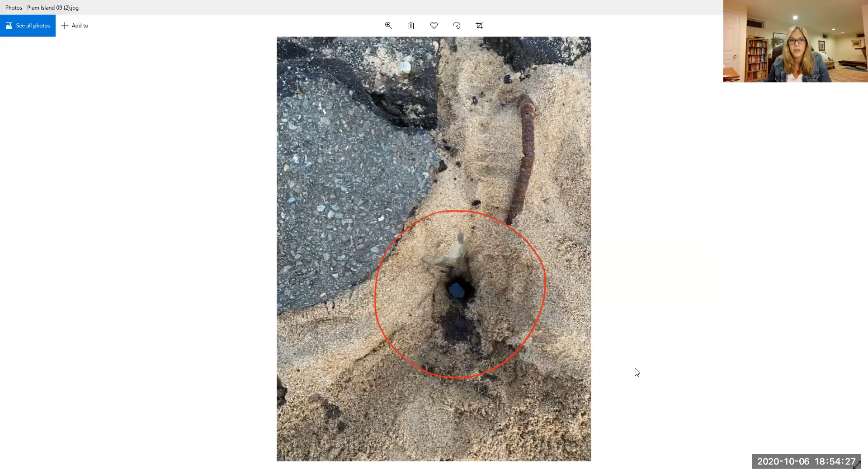I was out there like a month or month and a half ago, and these things sticking up with these big pipes were not out yet. Yeah, here's another, can you see this? That's frightening. Yeah, this is the actual oil where they started to see it.

So they've been pulling oily water out of here, and they've already filled 8 barrels today, and they still haven't really even begun to get involved with what's down there. So it's a sort of a mystery. If this was a filling depot of some type, there could be a number of tanks, and they could be pretty large too, so it could get messy quick.

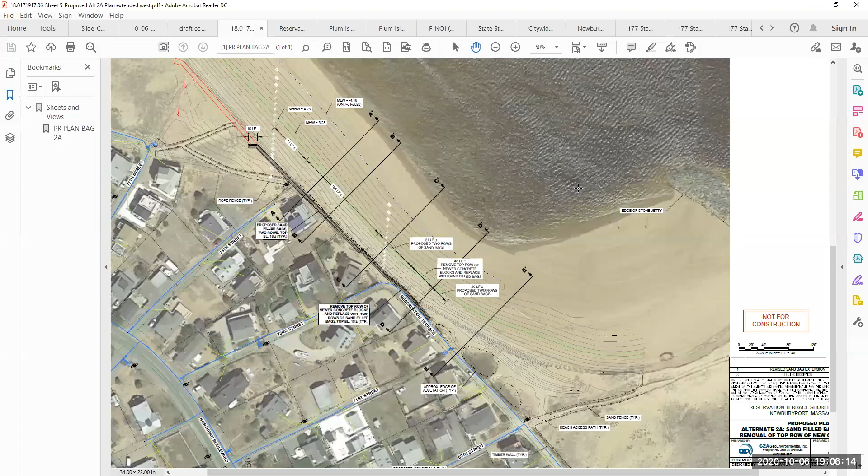Well, I'm personally not in favor of it. They're illegally put up there, and I don't know if the commission wants to have a vote on that. I'm fine with that. I have to be a no vote on that, because it's allowing.

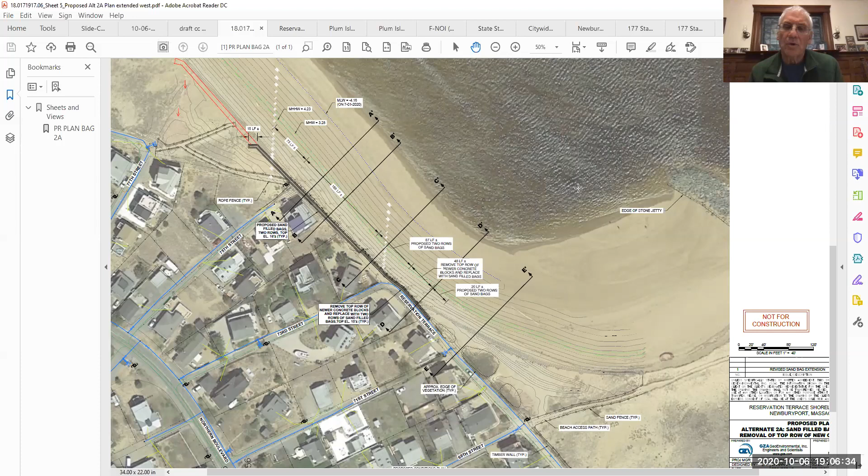What happens if those blocks are buried in 4 months? I'm sure no one is going to want to excavate beach sand to pull blocks out that were put there illegally. Well, I think you would be able to put something behind the blocks to shore up the sand. I think we'd be able to do that, and then take the blocks down and replace them with the super sacks.

Could I just ask a question? You had said that the super sacks were biodegradable—does that mean they're going to stay in place? We're hoping—again, I don't have definitive information on how long, since this is all new—but it's a fabric material that is very strong, obviously, to be able to hold 900 pounds of sand. They're certainly more durable than the fabric in coir bags, for sure.

I was just zeroing in on the fact that I originally thought DEP wanted these removed eventually. No, it's not that they don't want the super sacks removed—they want, like you, the cement blocks removed. Actually, Secretary Theoharides was very pleased that we were able to find something that was a temporary solution until the river is dredged and we can put that material back on Reservation Terrace, remove the super sacks, and hold them for an emergency.

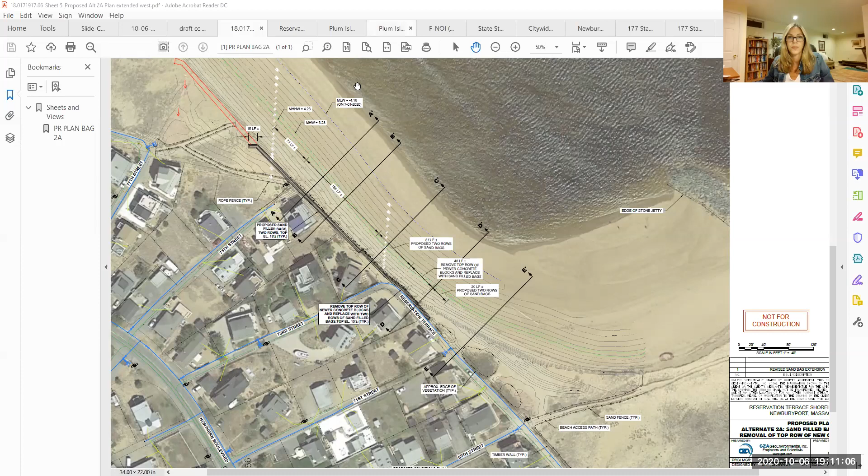No, I think we're all concerned. Can you see this? Not yet. No. Okay. Can you see it now? Hold on. Resume share. Oh yeah, okay. View share. Getting there. Now you can see this. Yes, yes, okay.

So I have zero issue with extending the bags out toward 77th. I just have a huge issue with the blocks. Right, and I apologize, there was a video, Donna, which I think someone sent to me, and it expired when I went back to find it today. The link to that was gone. It really showed the cement blocks, the waves pouring over, but then also showed the sand accumulating on the other side.

So aren't these super sacks taller than the blocks that get put on top of the blocks? Yes. So if you remove the cement blocks, which I believe are maybe 2 feet high, and replace them with something that's 3 feet high, I think that's a good thing.

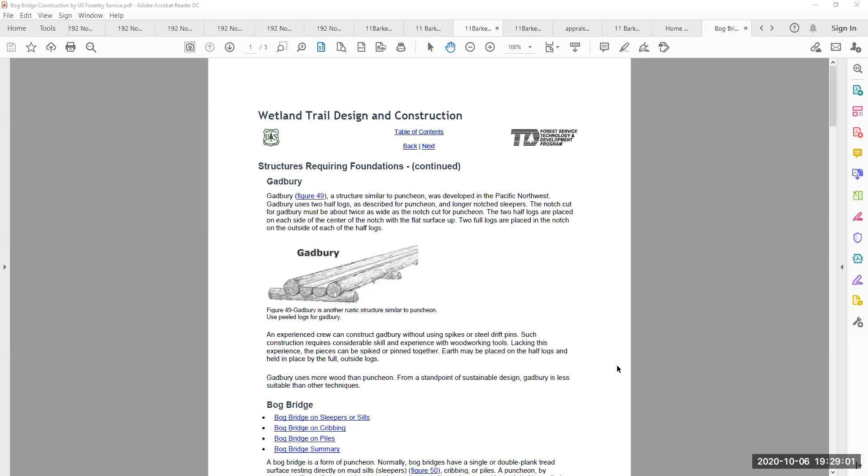So Julie, you were telling me that we have like $65,000. Yes, we do. We have some funds in the account that would be available if the commission wanted to vote to use some money to contribute to this project. Well, that's one of the things our money is actually for, doing stuff like this. I would hope we would consider paying for it. I'd be more than happy to pay for the wood required.

Okay, so the total would come to what? And then you all can vote on it, and we can get an invoice from Jerry. So that'd be like $1,866 or something. That's correct.

Okay, I'm good with that. Just out of curiosity, did you ask Home Depot to donate some of this? Because they do donate to charity. Yes, I did specifically let them know, and in the past they've always been very good about it. But because of the worldwide lumber shortage due to the pandemic, their corporate vetoed it. But we asked. Not surprising, it's fetching a pretty penny these days. Yeah, it's sad.

So again, Jerry, the process for this would be the way you invoiced us in the past through the Parker River Clean Water Association. Does that make sense? That makes sense. Yeah, okay.

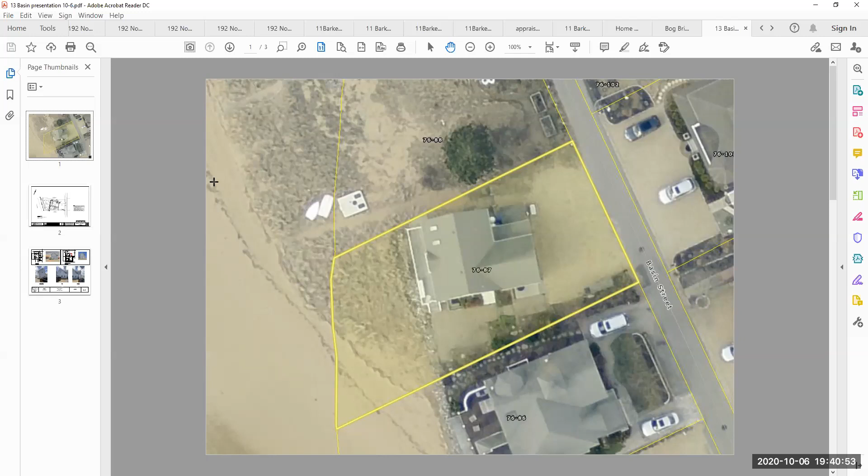So that's one thing. If we can go to the next sheet, this is less important, just a survey of the lot. It pretty much shows you the similar situation, with the elevation out front about 12.5 in that gravel area. It actually drops down at Basin to about 12.

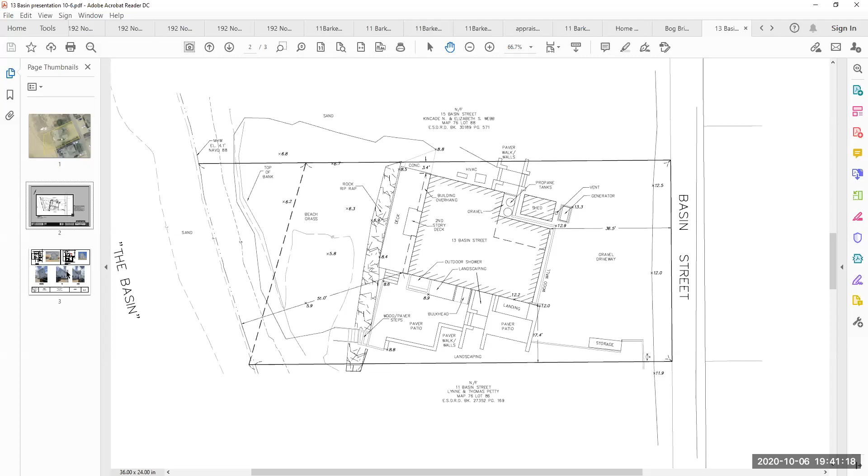When we met Julia on site, I think we agreed, at least at the time, it seemed to make sense from a floodplain perspective, if it's on the opposite side of the house from the source of the flooding, that it may actually have less of an impact in a sense than something that juts out across the direction of flow of the water, which the one on the side would do.

I would agree with that. Is there anything you can do by turning a window into a door or anything along those lines?

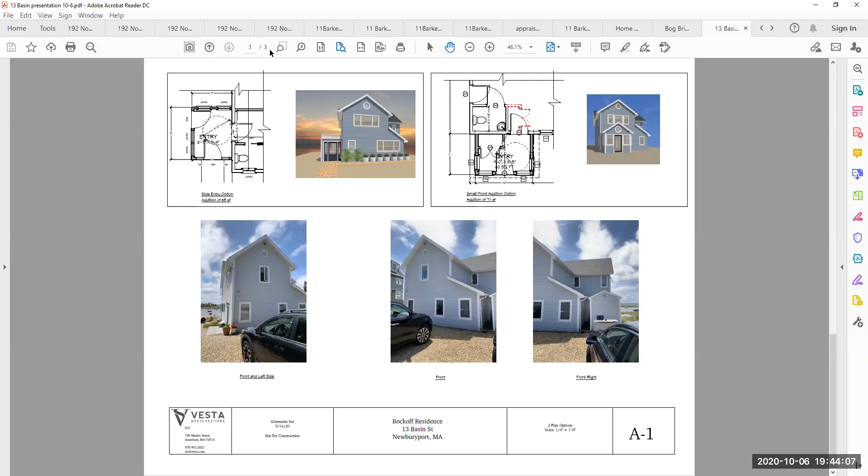Okay, so Julia, maybe you could zoom in on that upper right. This one, okay, hold on a sec. Okay, so this says 9 by 6 feet 5 inches. Is that right? Mm-hmm. Okay.

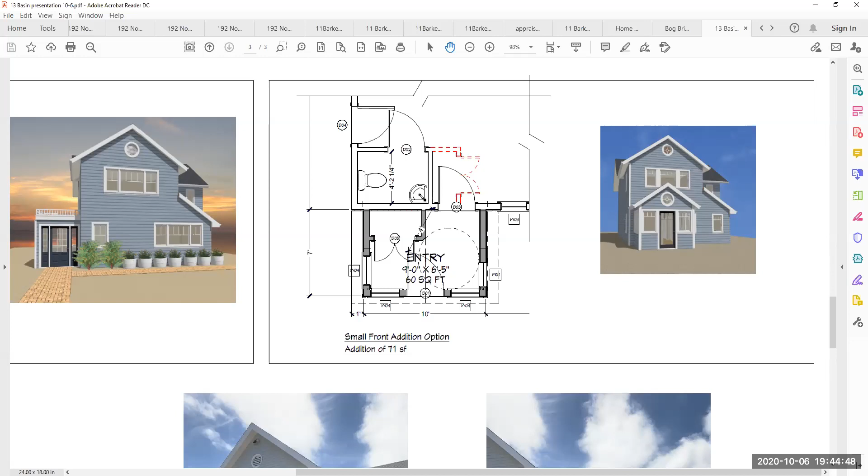So are you adding, is that a closet getting added? We had to remove the closet in order to put the door on this side. So we did add a closet because we had to remove the closet. So you're coming in where a closet existed, which you can see in red. Yes. So we're not trying to gain closet space, we're just trying to make it work.

And this new entry area is not heated. With these sort of breakaway walls, I'm not sure. It is within the flood zone, and we were planning on having it as a heated part of the house, but... yeah.

I guess my other question would be, why not shift the door to the right more and not have a fourth window? To get rid of the closet part of it... no, shift it to the right, so you have a straight shot in instead of having to angle over. The closet won't get in the way at all. Seems like it's in the way of the door now. You can't come straight in.

I mean, you could do that, but it's more important—there's several issues. When you're in a wheelchair, it's actually more important to have a minimum of 4 feet between the swings of 2 doors, which you can see this dimension on the plan, 4 feet. And so I have the 5-foot turnaround radius. When you have doors in sequence, ADA standards require a minimum of 4 feet to allow the doors to swing and the person in the wheelchair to still have space to maneuver. So moving that door over actually shortened that to somewhat under 4 feet, and I was trying to put a closet in there too, so I just used that space.

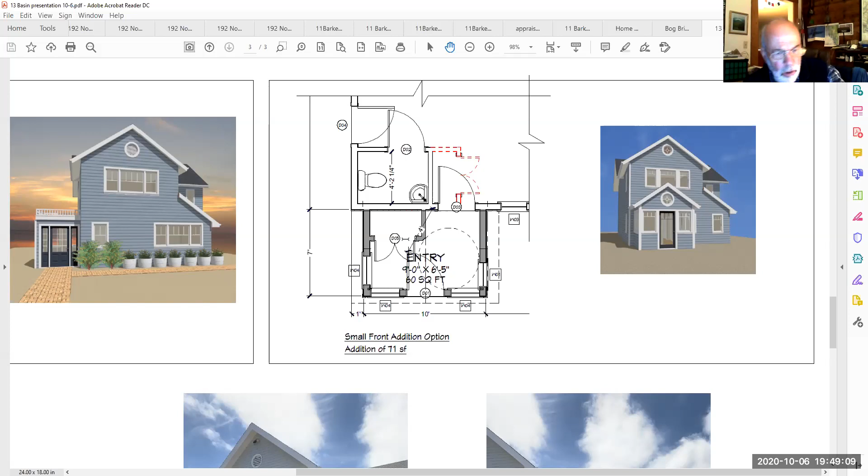So if I look at the picture on the left, in the front of the building with all those planters and stuff, you've got one window, and then you've got 3 windows. When I look at the picture on the right, I don't see that middle window or the left-hand window—I just see the window on the right.

So the middle window is a proposed change to the house on the first floor. And if you look at the right hand, you can actually see the edge of the existing window casing. Okay, those 2 windows are existing—the larger middle one was just something we were discussing.

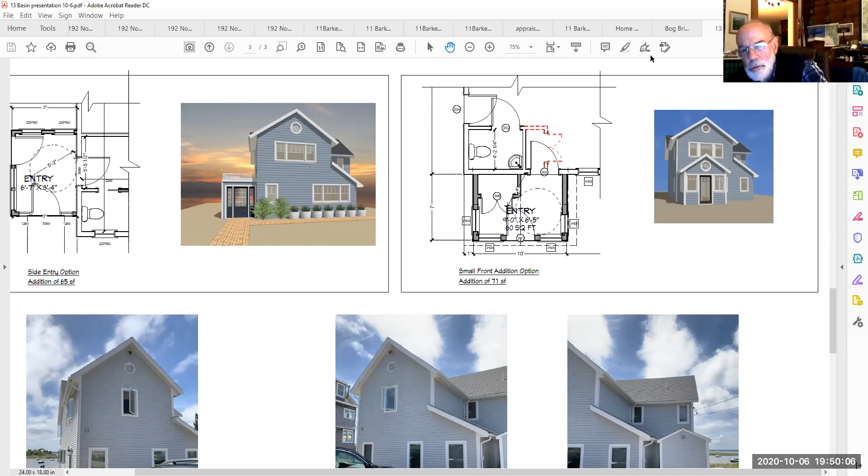So what I'm thinking is if you take this addition that you want to add and shift it to the right so that you can maintain that closet on the interior, then you'd have an entrance going straight into the home, and you wouldn't have to have a closet in an unheated portion of the building.

So the reason we wouldn't want to do that—I don't have the full plan, but the existing family room is like 9 foot by 10 foot, very small. If we were entering there, there would be no space for furniture in the room. I think they would be more interested in doing the side entry, because that room would not be usable anymore.

And that side entry, what room would that go into? Right now, if you see the picture on the bottom left, that's the existing entry door on the side.

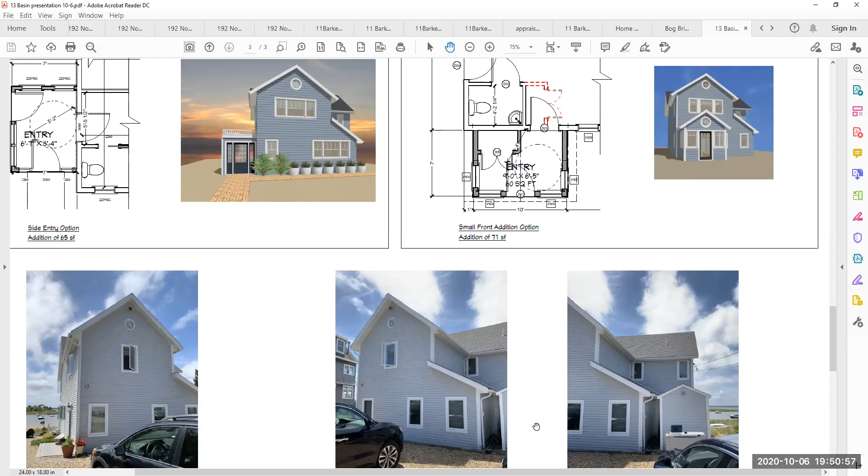The reasons we were less interested in that option are it's closer to the water. It's also, I don't know how the neighbors are going to respond, but it's one neighbor's view directly through to the water. I don't know if that's a consideration, but they probably wouldn't appreciate it.

Yeah, well, that's fine too, but I think the addition being in the shadow of the house, assuming direct floodwaters come from the basin, being in the shadow is a smarter way to do it.

I still have, as an engineer, I'm just confused as to why the door is centered on that thing and it's not shifted to the right a bit so it doesn't interfere with anything, and then there's a straight shot into the house instead of going in and going to the right a little bit.

But I think, and Rachel, you can probably confirm this, what we would plan on doing with our submission is give you more of the interior space layout, because I get the sense that it's the interior space layout that constricts where you come in. If you come in to a family room in a way that destroys the family room, you're taking away what little living space he's got on the first floor as is. So I think we could justify the location based on giving you a better sense of what the inside looks like beyond just where the closet is.

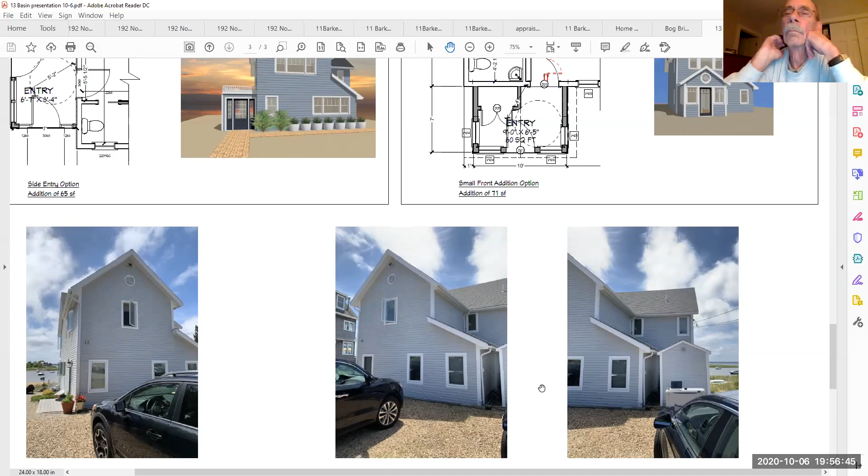It was unheated? I think we were planning to heat it. But I imagine it's like my folks had something like this before they moved out of their house - it was sort of an entry with its own little separate heater system so you don't lose all the house heat when you walk in. It just kind of keeps it warm to serve as that buffer, same thing as when you go into a store and go through that initial entry - there's heat, but it's not the same heat that's inside the building. It's a separate system typically. Is that correct? Yeah, that's fine.

Can I ask one more question? The grade of the driveway is actually a couple inches above the grade of the finished floor of the house. So when we remove the stone that's there now to put in something like chip stone that will be better for a wheelchair, does that need to be included? Yeah, I would include any of the landscaping change in materials associated with this as well.

Any resurfacing of the driveway should be included. Yeah, I think there's a good depth of gravel there, so it's probably just removal of gravel. Typically for driveways the commission has allowed up to a 6-inch cut, and I think we could stay consistent with that. I don't know the exact elevation changes, but whatever we have to request a variance or waiver for, we'll do, and make an argument for the performance standards as best we can.

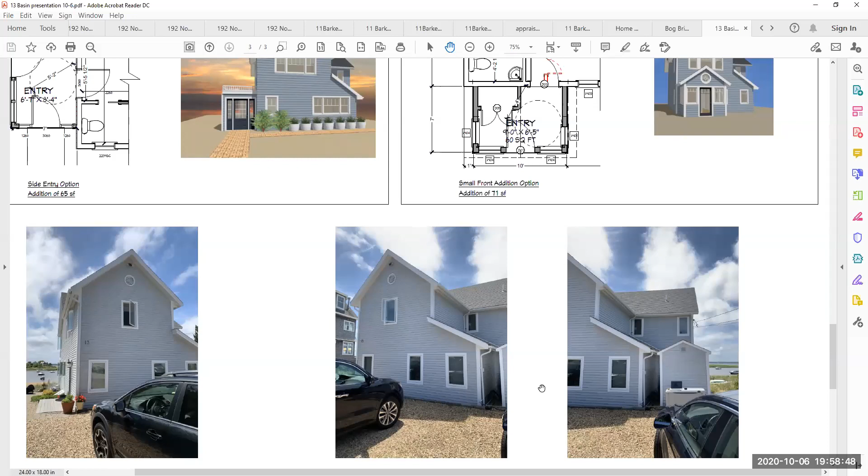Okay, so our plan is to try to put together an application to get on the next available meeting we can make, and we're going to have to race to do that. We need Everett to put together a site plan - he does have the survey plan, and now we know which option we're going with. We'll try to get this in the door ASAP, so just be ready.

If the commission wants to do a site visit in the meantime, that would help speed the process up. We'd really like to get this so the builder could maybe try to get something in for the winter. Does anyone want to do a site visit? I don't think I need to see one. Okay, pretty straightforward, excellent.

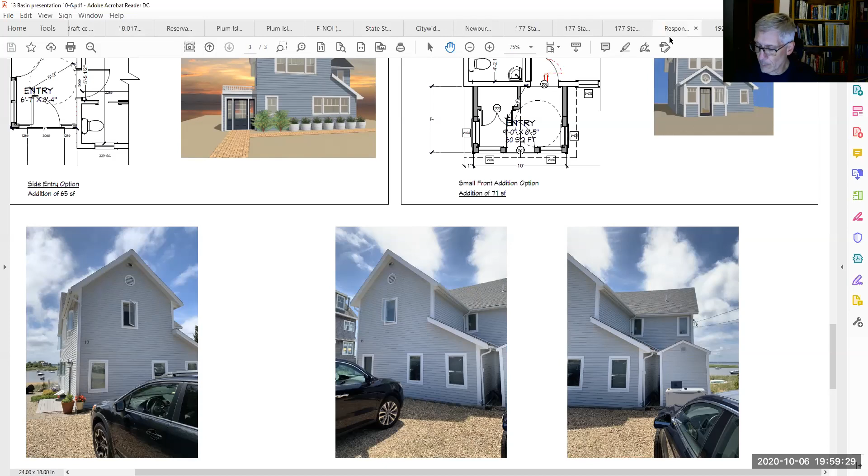Next item's George Hasseltine, 149 State Street. Let's see who's here. Is this Charlie? Anyone else here for 149 State Street? Is anyone here to speak for that? Got Charlie holding your hand up. Okay, unmute yourself, Charlie.

Yes, this is Tim Toomey - I'm using my son's computer tonight, so that's why you had to put your email address in. I had to use his to get onto the Zoom. So it's Tim Toomey, and I'm representing Gordon Realty Holdings and also George Hazeltine. I'm the licensed site professional that will be managing any soils out there that might be impacted by a previous spill, and I'm here to answer any questions you might have.

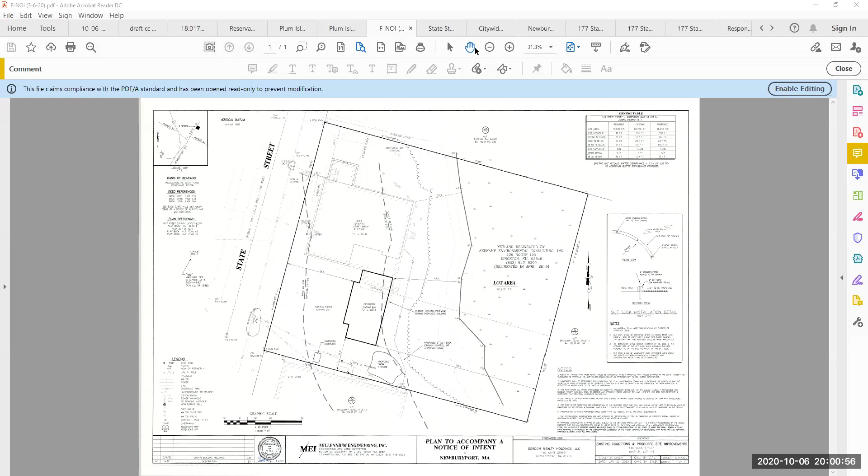I sent a letter in last week - Julie, did you get that? Yep, I have it, I believe, is this it? Yes. Anyway, the site was a location where some chlorinated solvents were released to the ground, basically on the top portion of that area where the major spill occurred. Throughout the property there is some residual contamination, and the addition is on the opposite side of the building.

The addition will involve digging a footing and placing a foundation there. So the soils generated during the construction of the footing and foundation will be managed on site and will not be disposed of any place. If it was, it would be managed under my license.

But there's just going to be a reuse of the soils over there. In the interim, when the soils come out of the ground, they'll be placed on a poly sheet and covered with a poly sheet to keep any rainwater from hitting the pile. Also, a silt sock will be put down on the down-gradient edge of where the pile is going to be placed.

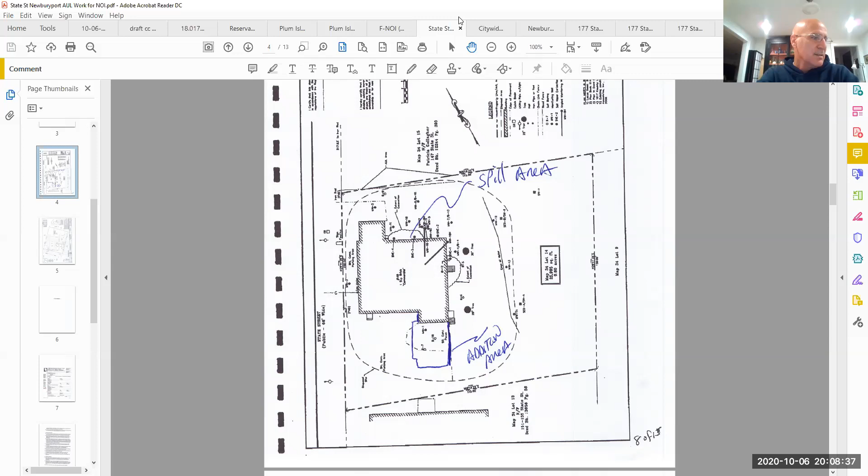Do you have a reference to where that investigation closure report would be? Yeah, it's on the DEP site, just look up the address, or you could put the release tracking number and search on that instead. Either way, you could get it. Newburyport, 149 State Street, it would come up, the report that I reviewed. The release tracking number is right here, it looks like it's 3-21054. Can you see that? That's correct, that's correct. The 3 being Northeast region, which is this region that the category is in for the DEP.

Okay, are we set with this? Any other questions? Everything's fine.

It looks like that this was the condition. We just needed this report and this presentation prior to their start of work on the site. So if you're all satisfied with this and they've submitted all the other necessary information prior to the start of work, then they can move forward.

Okay, do we have this report, Julie? I don't remember seeing this. They sent it to me. I thought that I emailed it to you all or forwarded it to you all for tonight's meeting. If not, I apologize, because I knew that they were going to give a presentation. If you'd like, I'll re-email it to you right after the meeting so you can have a copy.

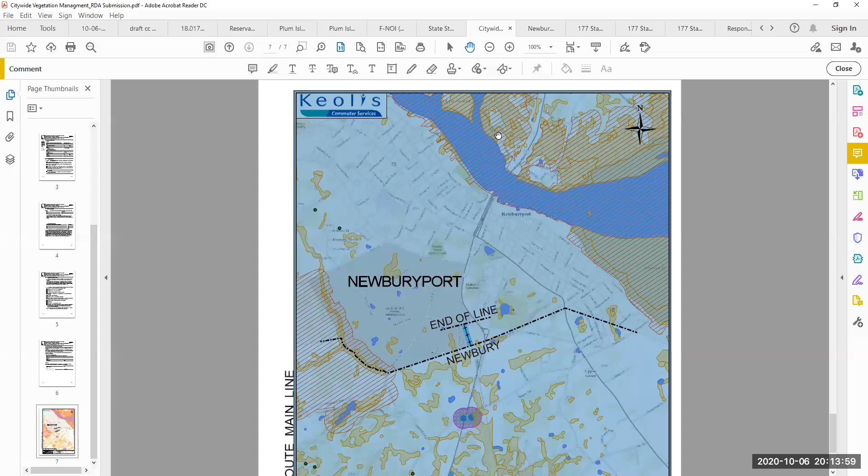So the RDA was submitted as part of CMR 11, as well as specific sections of CMR 10, which require us to submit the delineated maps to confirm that the boundaries of the resource areas are accurate. The requirements are part of a 5-year vegetation management plan, which is designed to manage and control vegetation along the railroad, necessary to keep it safe for the railroad and the public. As the plan is executed, great measures are taken to keep the sensitive areas protected, and the sensitive area restrictions are listed and described in detail in CMR 11, as well as Section 8 of our vegetation management plan.

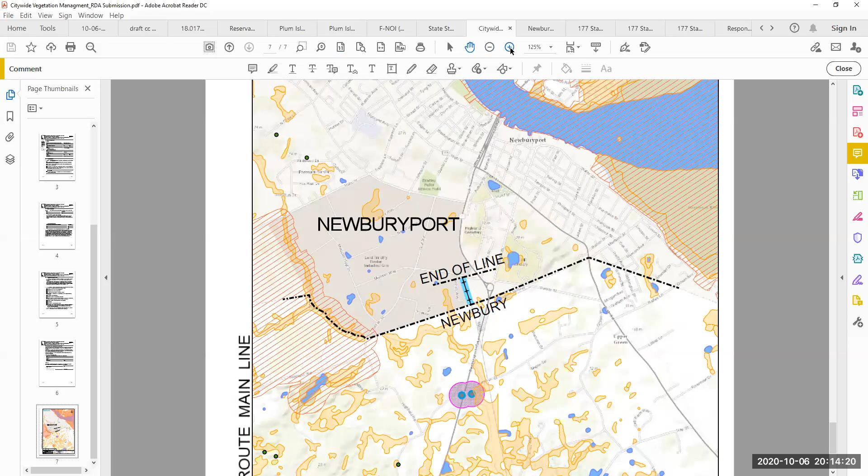The plan is regulated on all levels from federal to state to municipal. As part of the 5-year plan, your commission, the Board of Health, the Board of Selectmen, and the Department of Agricultural Resources are supplied annually with a yearly operational plan, which is consistent with the vegetation management plan and goes into more detail about the vegetation management activities for each year throughout the 5-year program.

The vegetation management plan includes an integrated vegetation management approach where chemical application as well as physical and mechanical methods are used to combat the vegetation. Keolis has implemented best management practices used throughout the plan in an effort to limit the chemical application, which has been an objective for them.

The map that we provided you with is mainly made for the chemical portion of the plan, made with USGS and MassGIS layers to determine the boundaries of the sensitive and protected areas. We also get a list of all the private wells. Not that there are any in your town, but we do check to see if there are any private wells along the railroad, and we get that from the Mass DAR.

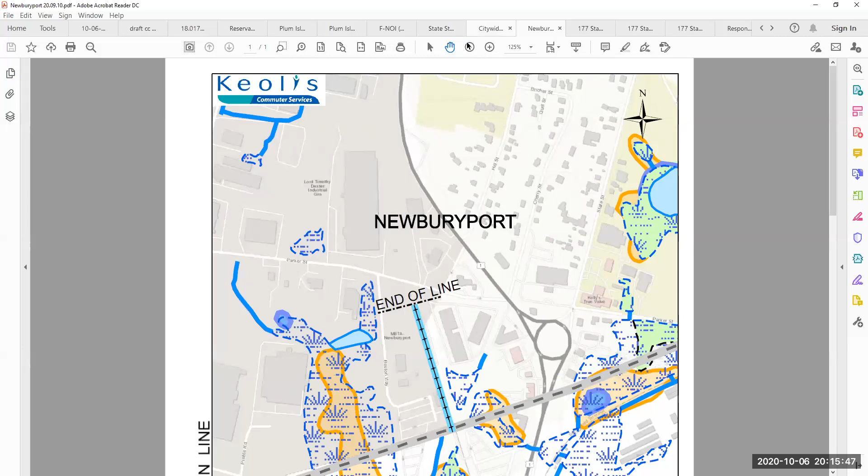So as you can see, there are areas... in Newburyport, there's just a very small section of railroad that goes through your town, and it's entirely a light blue section. So what this light blue section means is that it's in proximity to a wetland and that it's a limited spray area.

Because it's light blue, it means we are able to apply the herbicides there once every year. Just because it says that, it doesn't mean we'll be spraying it every year. In these areas, whether marked blue, yellow, or light blue—and here it's just blue—it's really only sprayed on an as-needed basis because it is known to have resources in proximity.

So more of an effort in these areas: the track structure itself will always be sprayed directly down on the track bed, because there's no other alternative to control the vegetation there, which is federally mandated to be kept completely free of vegetation. Outside of the track structure, more effort is taken into physical and mechanical methods to limit the chemical application in these areas.

So the tracks themselves in the field are marked with blue plates that correspond to this blue area. The applicator, who is licensed and certified to do the work in the state, rides along and will see that, with these maps on hand. There's also an environmental monitor, a direct employee of Keolis's environmental team, who carries these maps to be aware of when these restricted zones are coming up.

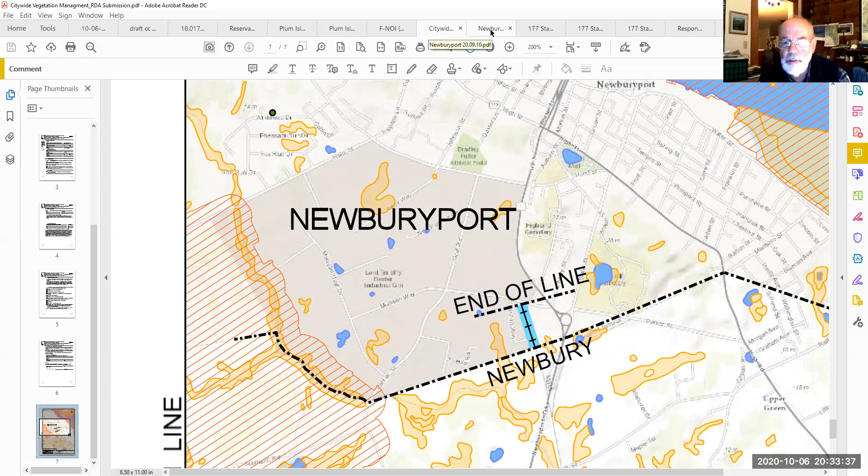I think what we're asking for is a more detailed map that depicts the distances from the track to where the wetland is.

Yeah, so the entire track is within the 100-foot buffer zone for that entire resource area. There's no question about that. There's about 500 feet of track that is within the 100-foot buffer zone area, which is why it is depicted as a blue zone, which is how the regulations require us to delineate these areas. So there's no question that this is all within the 100-foot buffer zone for that entire V-shaped resource area.

The 100-foot buffer zone you're asking me to put on wouldn't change that, because the entire track is within that buffer. So what you're saying is the only thing that would change this for us and for you regulatorily would be if the line was going directly through the wetland area and not just within the buffer zone. So because it's within the buffer zone, it doesn't matter whether it's 10 feet from the wetland or 99 feet from the wetland. It's going to be delineated as light blue, and managed as a light blue zone, unless it has other resource areas intersecting it, like a surface water supply area, an interim wellhead protection area, a culvert, or an intermittent stream.

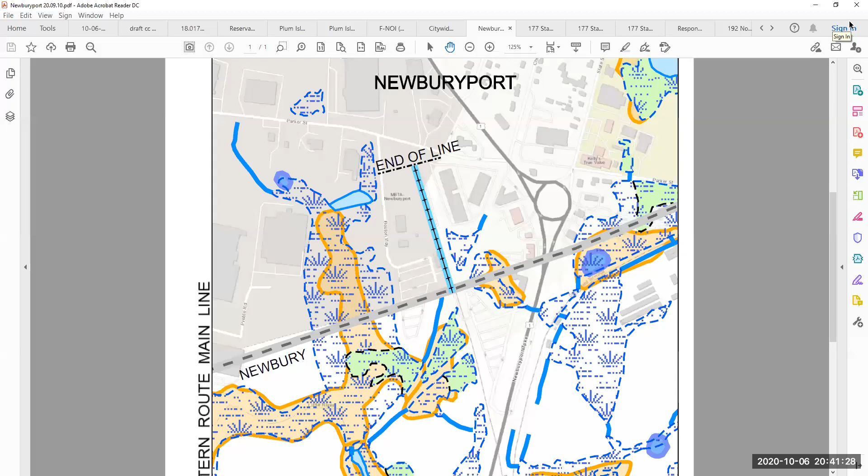Yeah, well, it sounded like a -3 would be the most appropriate. I don't see what advantage anybody would have with an NOI.

I'll make a motion to issue a -3 determination. Second.

Paul Haley, yes. Steve Moore, yes. Dan Warshall, yes. David Vine, yes. Jane Sender, yes. Ron DeCola, yes. I'm going to vote present.

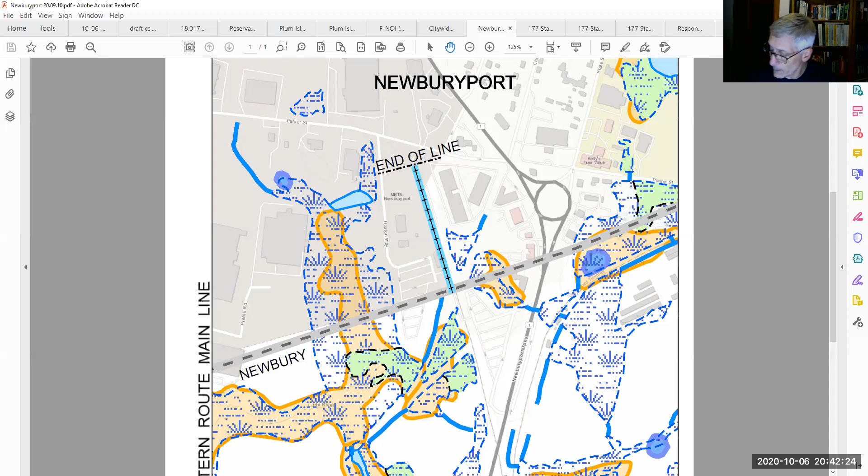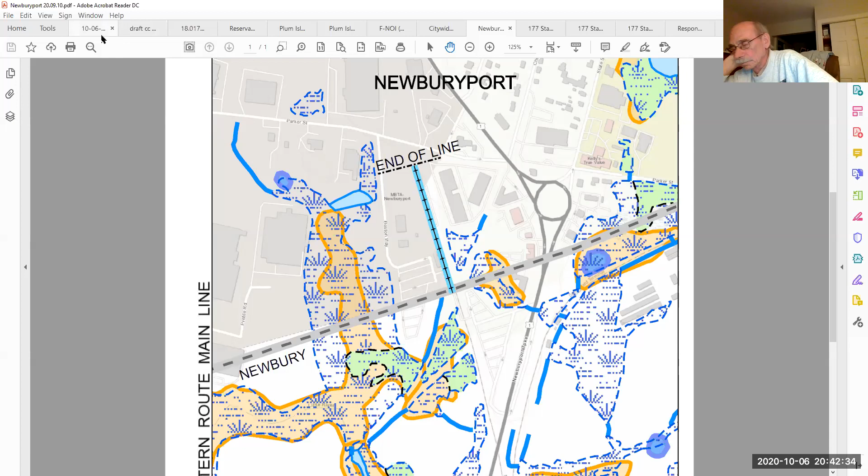All right, next item, Joseph Bavaro, 177 State Street, request for determination.

Okay, I'm going to allow TJ Melvin to talk. You can unmute yourself. If there's anyone else here for this, raise your hand. TJ, are you representing the project? Yes, I am, sorry. TJ Melvin with Millennium Engineering, here on behalf of the applicant.

The project located at 177 State Street, also known as 3 Newburyport Turnpike in Newbury. I don't know if it's just me, but you're really garbled. Yeah, we're having trouble with your audio, TJ, I don't know if you can adjust it. Not really, you sound like a robot right now. With a cold. Are you there? Try again, TJ.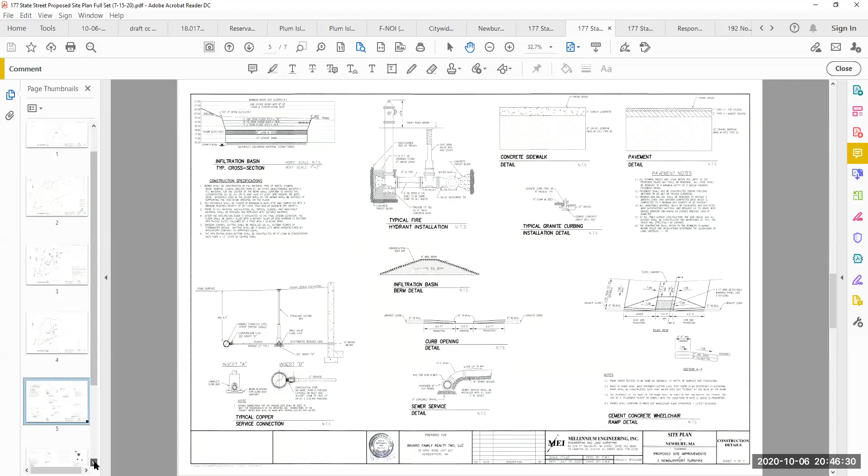Okay, well, not a lot for us to look at. No. You want to just describe the stormwater system briefly?

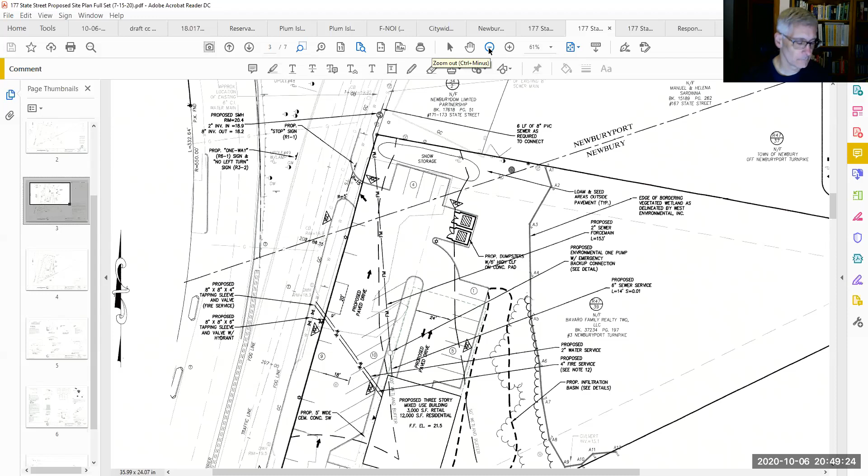So the water is being directed into Newburyport? Correct. And so that snow storage is just going to drain over land into the wetland there? Yes. Okay.

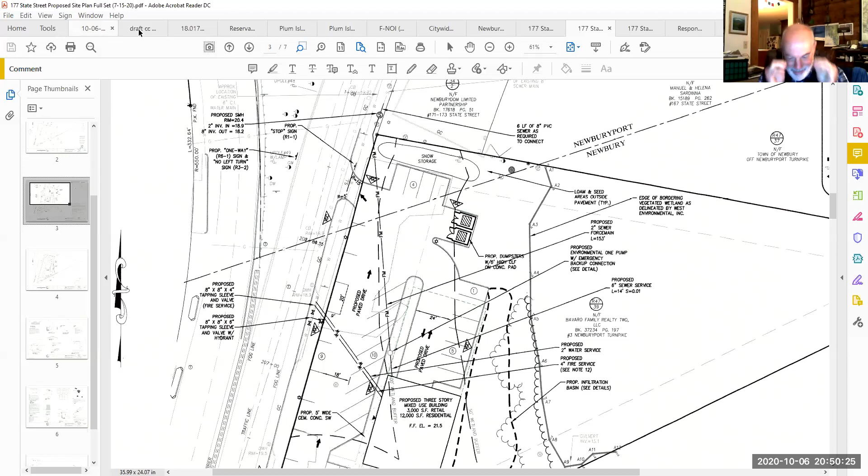Thank you. Does anybody want to take a few minute bio break? Yes. Okay, yes please, I do too. So we will take a break and we will be back in 5 minutes or less.

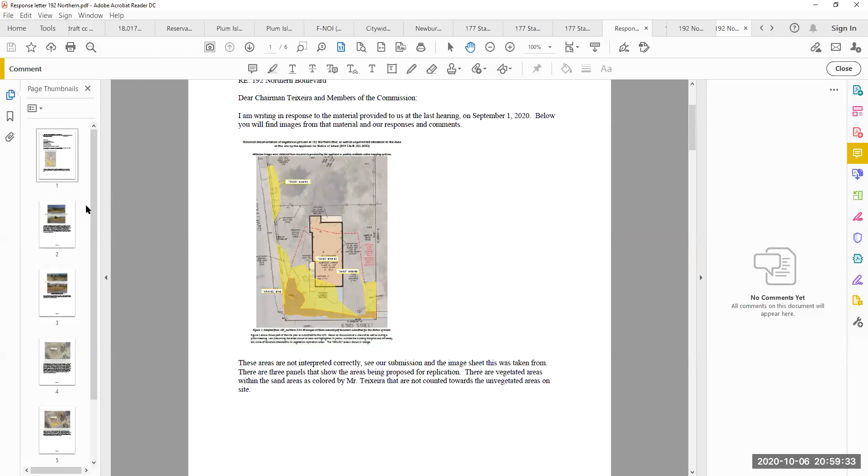Okay, in this case the upper undated image, the woody vegetation, both in the foreground and in the background, looks smaller. So I do suspect this is an older photo by a substantial amount of time.

But the one thing this is consistent with what we've been saying is that this lot is something where vegetation has changed over time. There are anthropogenic impacts, there are just natural impacts. Vegetation on a barrier island is dynamic - it dies off in some areas, whether from nematodes or people trampling it, and it comes back in some areas. In this case, the lower photo, which is from the fall, is fairly consistent with the areas shown on our survey plan. And I'll go over those in more detail.

Were we to do a complete survey of the site on the upper image, we may find that there are other areas that are vegetated now that might not have been vegetated then. So every time any NOI comes in, you're getting a snapshot of the existing condition at the time we begin work on that property in terms of detailing existing conditions.

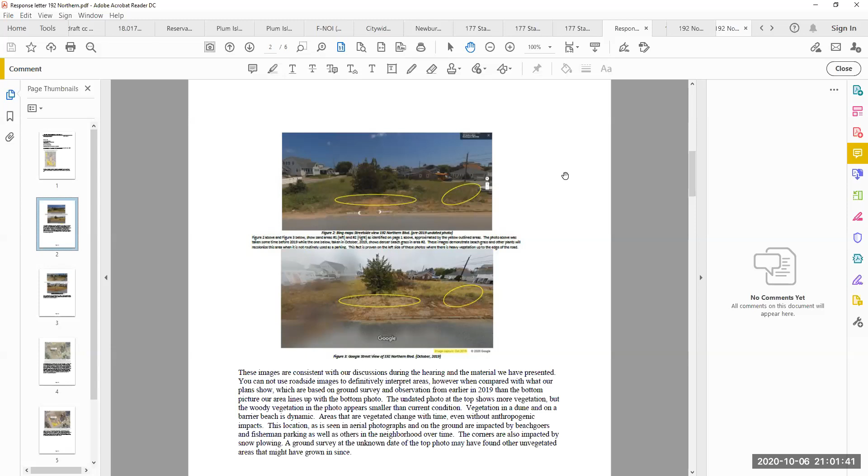So if we can go on to the next page. Actually, go back to that one you just were on.

We looked at these photos, both of them, and you look at the telephone pole. The bottom image is at a lower elevation and a lower angle, but they're really not all that different. They're clearly taken at different times of year - you can tell by the color of the dune grass. It's hard to discern anything other than that those lines are very consistent with our survey plan. Also, the top one does show car parking, well before any construction activity was occurring in the area.

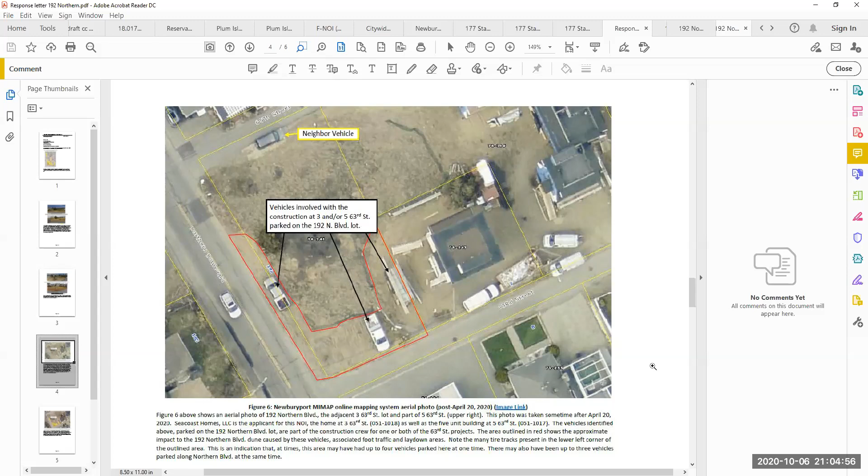But any damage outside those areas we surveyed as sand in our original survey, done well before any construction was permitted on the site, will be vegetated. So if we can go to the next sheet - I can't remember what's on that one.

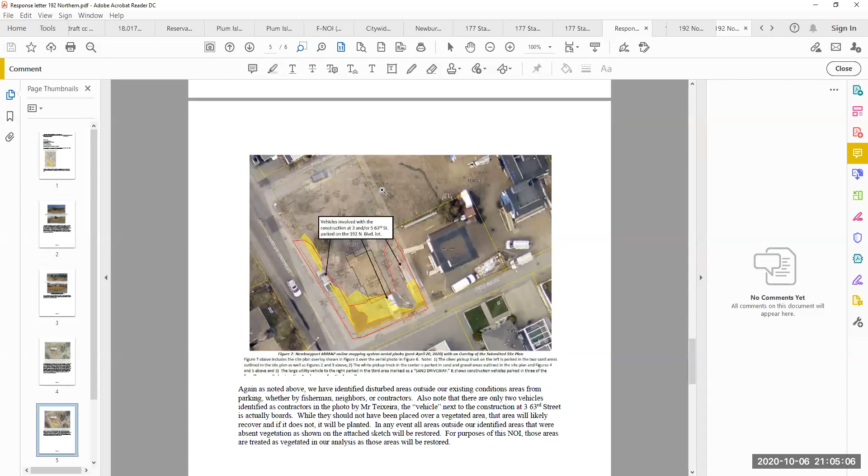The main thing here is we identified, on another sheet submitted today, essentially a sketch. We overlaid on the ground all areas that were disturbed with tire tracks or signs that they'd been used for storage, and overlaid that with our original survey of conditions before any construction was done. We created a sketch that shows all areas disturbed outside of those that were unvegetated when we first started.

Those areas will be revegetated, whether disturbed by the contractors or not. Clearly the areas over by the house on 63rd were done by contractors, as were the areas used by neighbors for parking along 63rd. The area along Northern Boulevard was likely both contractors and other folks parking there. But any areas that were vegetated based on our original survey will be revegetated by the contractor, regardless of the outcome.

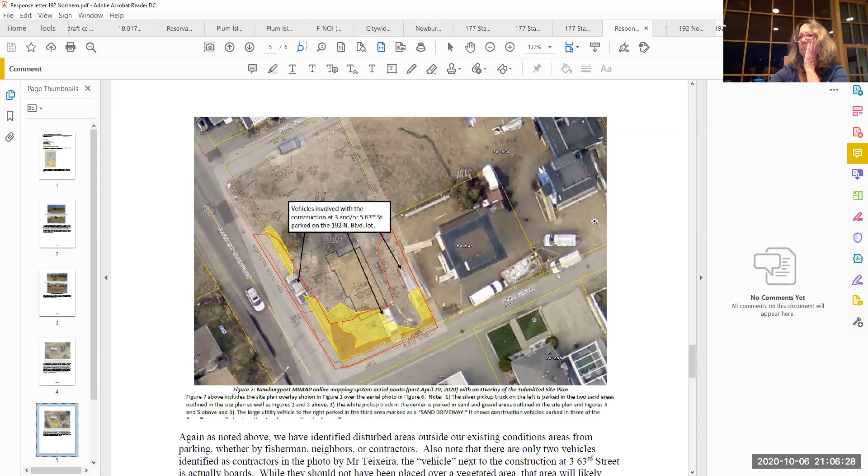Okay, so rather than using an aerial to definitively interpret areas of impact and all that, we actually did on-the-ground work.

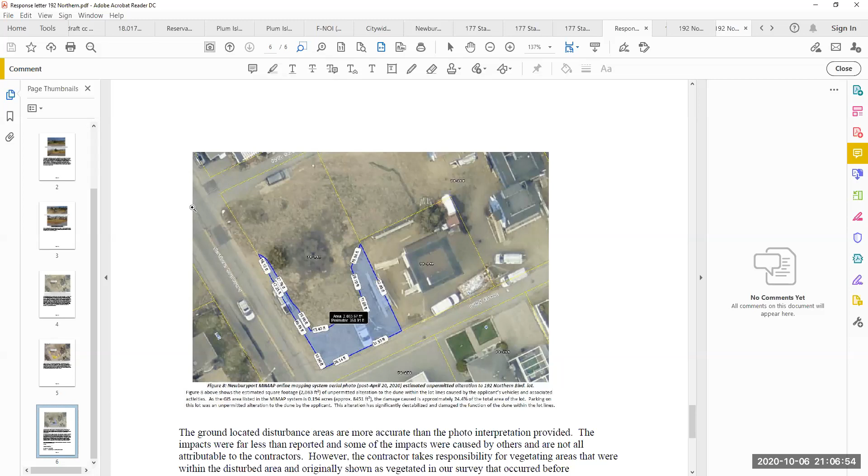This shows the actual on-the-ground evidence of disturbance of the dune, and it was overlaid with the areas that we surveyed. Those areas shown in blue are additional disturbance beyond what existed when we permitted, so those areas will be restored regardless of the outcome of our permitting here.

I don't want to dwell so much on the contractor impact. What we are including as areas that are not vegetated does not include any gain from any contractor impacts. We never have counted that, and we aren't in our filing.

Everything in green, you're not including. We are not including. Those are areas that are currently, well, some of them are actually coming back.

Some of that contractor parking appears not to have killed off the roots, and it looks like dune grass is coming back in some of those areas, but we will supplement those plantings to make sure all of those areas are in the state they were in before the work was done.

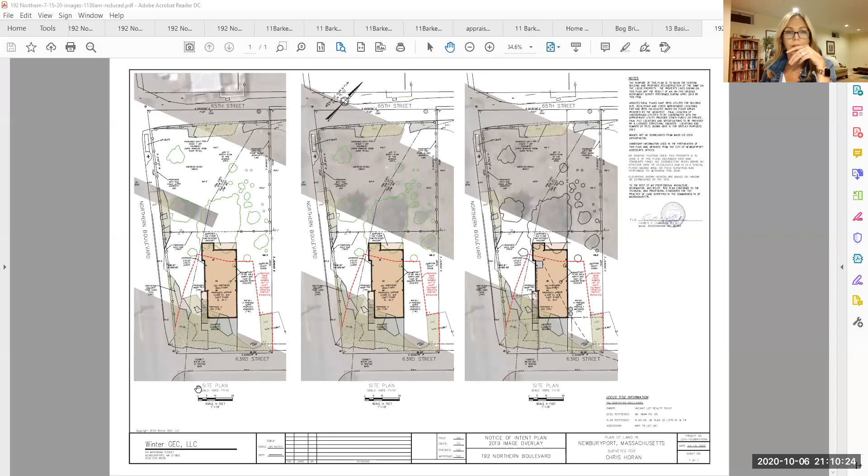Yeah, this was the one where we realized there was an error in the first version that we sent you. So if you can zoom in on the panel on the left.

So there's a couple things going on here. One is if you see the areas as sort of a yellowy green, while we're picking up the disturbed areas - I don't know if you remember on the site visit, there were some sandy areas with wispy vegetation. And I said that in some cases we would pick up sand within those areas, but we certainly wouldn't count the sparse area as non-vegetated.

We actually picked up the areas that are just pure sand within there, mainly because of the commission's discussion about some unease about not having any outdoor space associated with the house. So we wanted to see what we could do as far as that went.

So those areas shown in yellow, we just picked up, and those are pure sand - there's no vegetation within them.

So on the left, if you can zoom in any closer, this shows the areas that we counted, and then we removed portions - you can see some green areas there. So you've got sand areas, and then as a result of the aerial photograph review, we actually removed some of those areas, and I think you can see those areas are green on that.

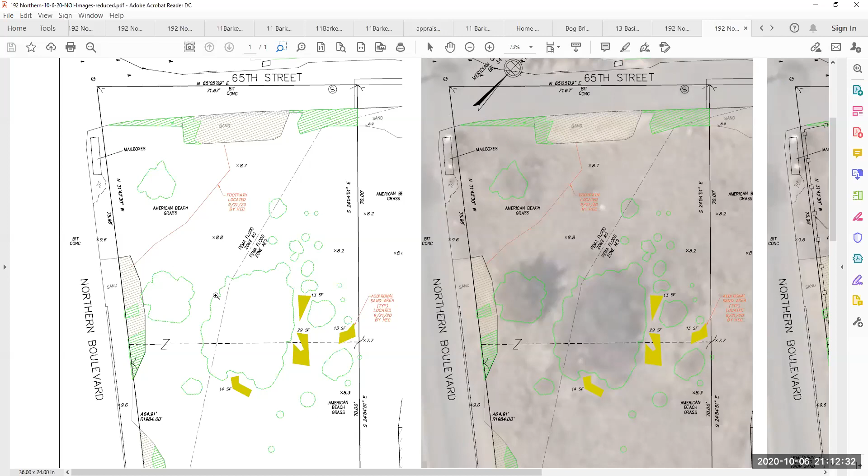Which labels are you pointing to? Mailboxes, additional sand area type located—what specifically? Hold on a second. I'm looking, I think the areas shaded in green were removed. Amongst those shaded areas, right, tan. Were those removed because they're not counted? If you look on the middle panel, you can see where those green shades are.

We had colors that were clearly not vegetated. Right, in here, this may have had vegetation, might have had. So when we did the survey, they were not vegetated, but earlier in the year when this area was done—so it may be that those areas are subject to seasonal vegetation when the Plum Island population is lower and people aren't using the site.

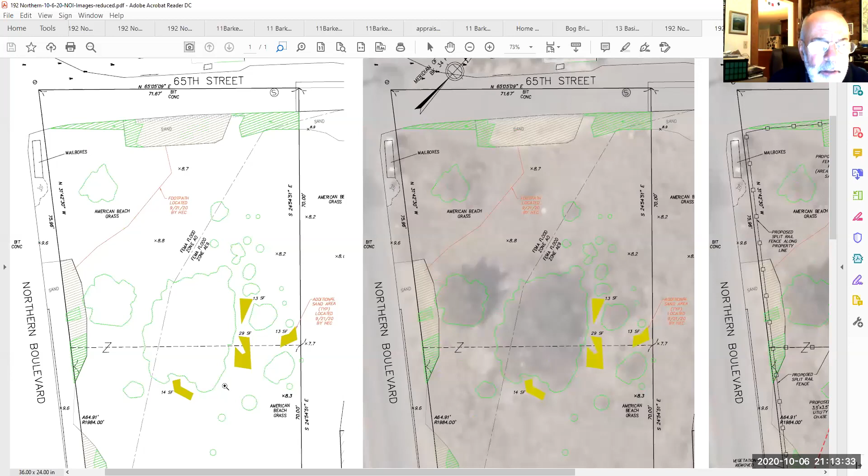Okay, so Tom, what do you mean by they were removed? In other words, we are no longer counting those areas towards our non-vegetated area. We basically said, between the 2017 aerial, the 2019 aerial, and the time when we did our survey, what's the intersection of just sand areas based on all three of those. I still feel very confident in what we did in our on-the-ground survey as far as capturing a snapshot in time. It was an accurate survey of what wasn't vegetated when we did it.

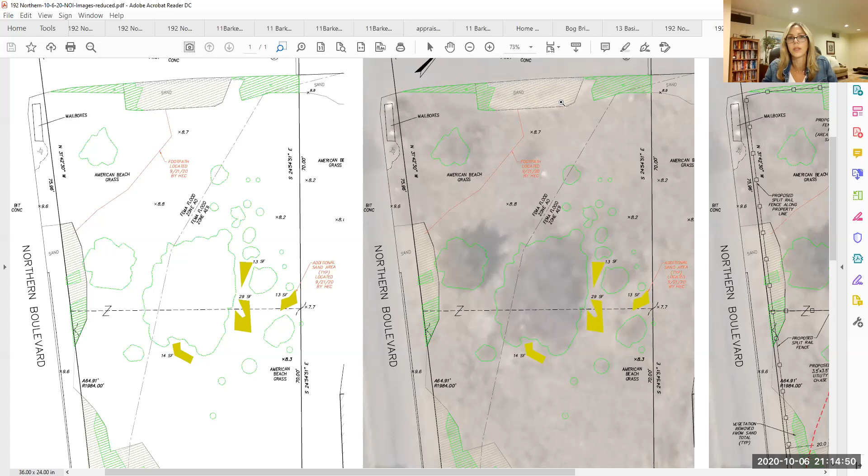When we used the aerial photographs, because there was a lot of questions from the commission about looking at street side, looking at different aerials, we tried to look at the 2019 and 2017 aerials to basically say, are there areas that we counted that within recent history were vegetated? We found those areas, and there's dark shading on these aerials, so we pulled those areas out. So with this whole area that used to be shaded as sand, now the areas that are green are counted as vegetation, and only this gray stripey area is considered sand.

And the problem, I think part of the reason there was some confusion, Joe, in how you interpreted that first page, was because when we sent in this document the first time it ended up being three images, meant to show you on the left just the pure plan, the middle sheet being it with the aerial, and then on the right it is with our proposed plan. We were trying to show you how we built to where we got.

But the reality is your existing conditions plan was a year old. You didn't update it before you submitted the NOI, and things had changed.

Well, the things that had changed when we went to file were things we didn't want to try to benefit from, because there were contractor impacts when we went to file.

So we did look at the 2019 aerial, which was another snapshot in time. We looked at 2017. And I think the things from the October 2019 street side are very consistent with what we claimed. They're at angles, but we looked for features within those images, including the telephone pole, which is a clear one. You have to remember the angles those photos are taken at can be deceiving.

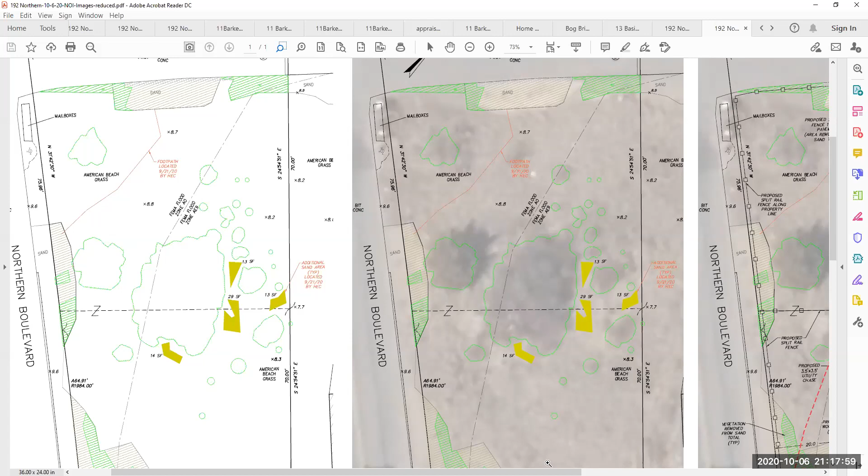And when we get into what we're proposing, if we can go over to the next panel—okay, hold on. So the thing we are proposing to do, you can see on this plan, is we start, if you can zoom in a little bit, by the driveway on 63rd.

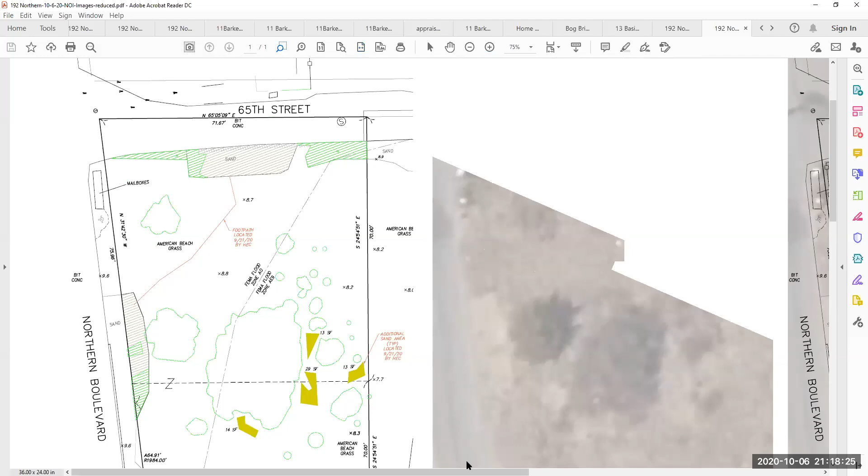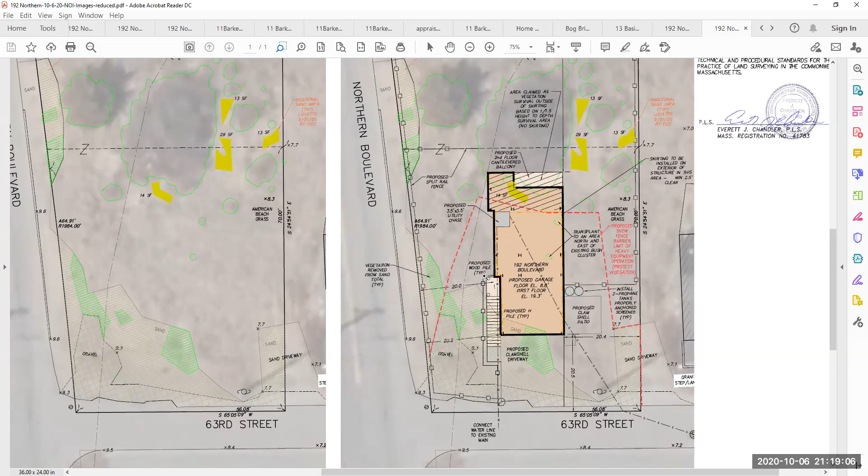Okay, so along the left-hand side of the driveway, a foot off the edge, going up to the walk to the stairs to get into the house, there'll be a split rail fence. That fence starts at the house, runs along the side of the stairs, runs along the driveway, runs right up to about a foot off the pavement.

We can't run along the pavement because in that case, the pavement is actually city property. So we run up to a foot off the pavement on 63rd, all the way over, and then come all the way down along the property line on this side.

And then we run over to the building right there, right before the propane tanks. I'll show you on the other site plan, it's easier to see, but we put in a clamshell patio, like 10 by 10, right before the propane tanks off to the side, to give that outdoor recreation space.

The other thing, if you look at the building, the hatched area - the light tan is a second floor balcony. The underside of the first floor is 8.5, 9 feet up, and the second floor is like 20 something feet up, so that's way up in the air and won't affect vegetation at all.

The hatched area is at a 1.5 to 1 ratio - height to vegetation survival. You may recall the commission has considered 1 to 1 as a reasonable interpretation of what would survive. We didn't want to claim we were overreaching, so we went to the 1.5 to 1 standard, which comes from marine fisheries and Army Corps studies recently about elevated structures going through wetlands and full survival underneath.

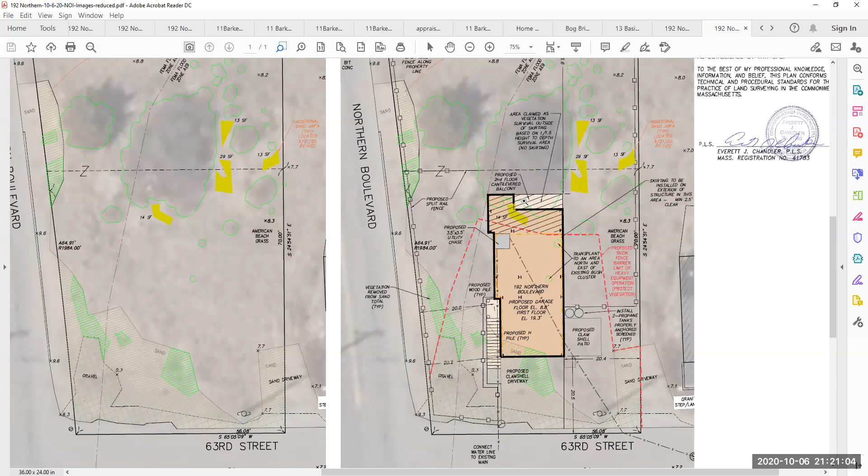In this case, we show a dashed line now that runs along that row of piles right behind the utility chase. The skirting for the structure runs across there, but everything behind it is open up in the air about 9 feet off grade, so we believe we can get vegetation to grow under there.

All of that goes into our vegetation table. If we can go to the site plan, I can show you what the vegetation totals end up at, even with the clamshell patio.

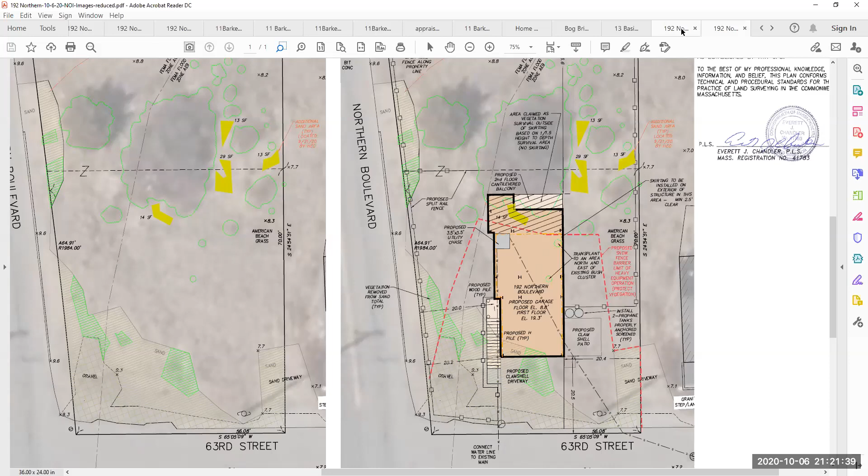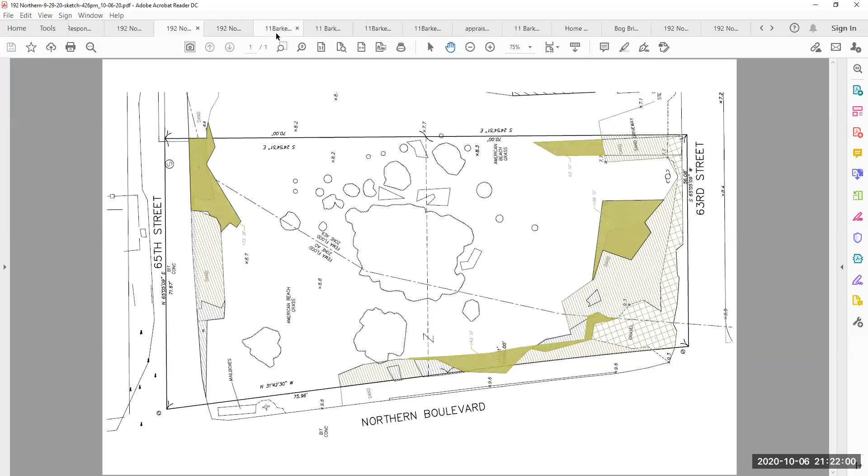Take me a while to find the site plan. Whoops, sorry - yeah, that's fine. Go way back. Actually, if you can go back to that profile view for a second, you were right on. Back over, you were right in that area. Nope, this one, nope, this one, nope. Hold on, sorry, there's just too many new ones tonight to get them straight.

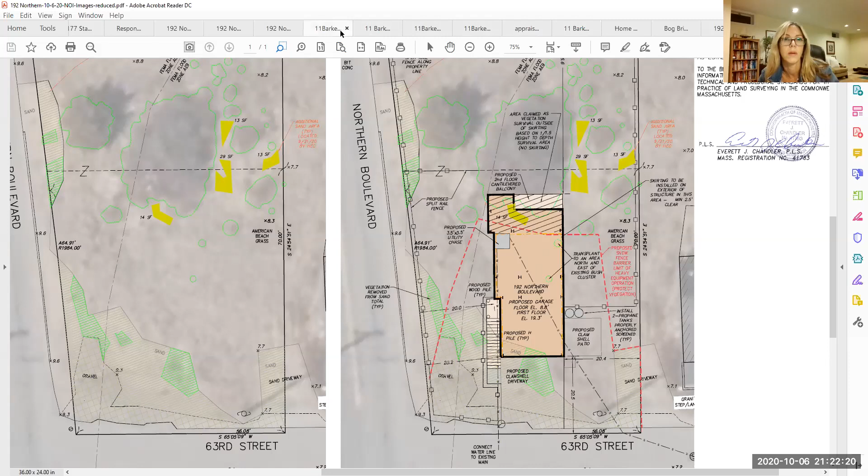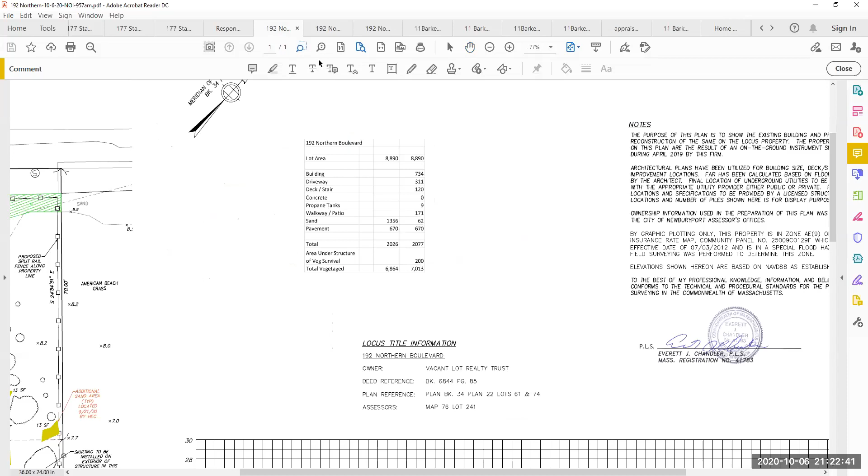You're talking about the profile, Tom? Yeah, I was just thinking while we're talking about survival under the building, but we can get back to that in a bit. Why don't we zoom in on that impact table? Okay, yep, and I will look while we're doing this - I will look for the profiles. Right, you had them open like 2 or 3 tabs away. I know, so many of these.

So, claiming the area under that elevated portion of the building that's wide open underneath, and it'll all be fenced off. There will not be easy access, so it won't be an area used for storage or whatever.

And those new little areas we picked up, we end up going from 6864 to 7013 with that patio. We would be fine removing the patio, but we do like it. And you guys did express some concern that not having some outdoor space would encourage some kind of encroachment in the future, so we tried to take that seriously.

And come up with a way where we commit to a lot of vegetation improvements. We're going to improve dune function by protecting the vast majority of the vegetated part of the site with that split rail fence. The other thing you'll see on the plan when we zoom out is we also picked up the area where it's regularly trampled.

Now the vegetation is still growing, but there's a regular path that people seem to cut from Northern Boulevard across. It's evidence of human disturbance on the site, and that kind of thing will end. There'll be no more parking outside of the existing or proposed driveway, and the snow plows will have to find somewhere else to put the snow. They'll no longer be dumping it on that corner because the fence will be there.

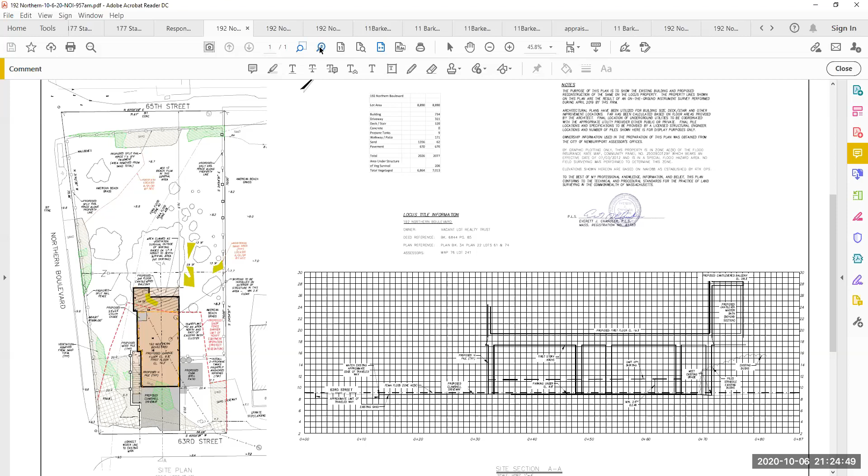Okay, great. In the upper left you might be able to see that little diagonal line that runs from the sand area on Northern to 65th. My guess is it's a shortcut taken by folks who are parking to go fishing, cutting across to walk up. It's not a huge impact, more like a little deer trail impact, but it's part of the ongoing impacts to the site.

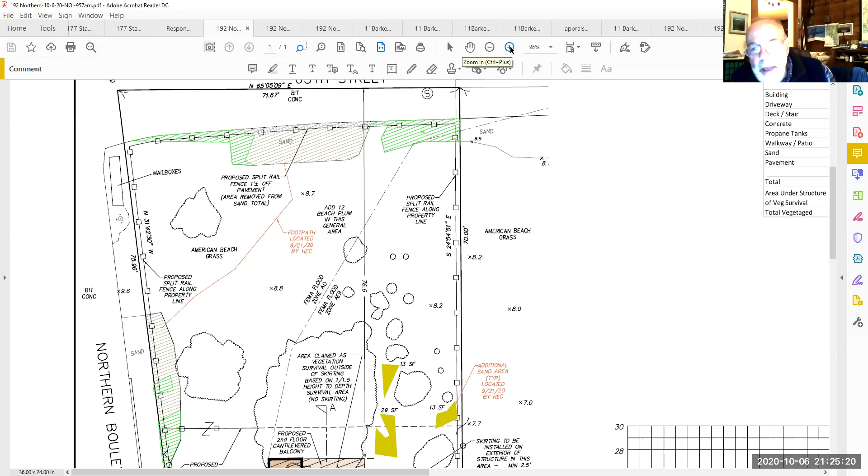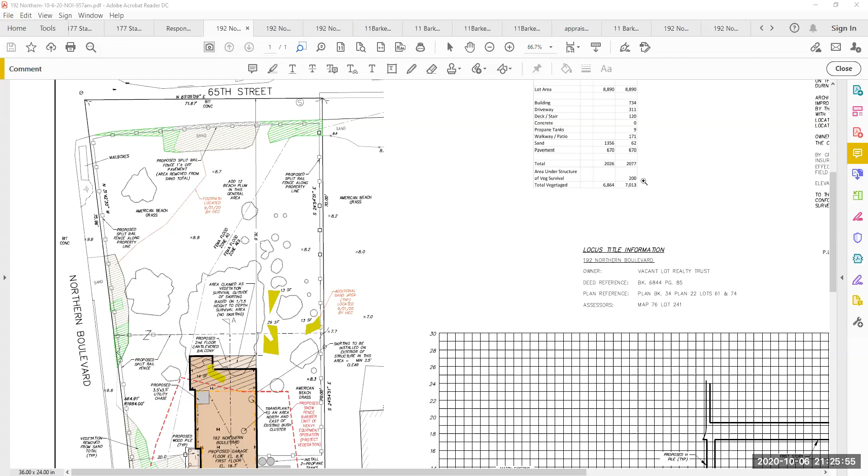So Tom, I had asked about a fence along the adjacent lot on 65th Street. Lisa and Chris did look into that, and I'll let them answer. Lisa, go ahead. Thank you. The applicant will put a fence along there on 65th, from the 5-family unit down to about where the driveway is. We don't have it on any of these plans, but Stephen and I talked about it after the last meeting, and he's able to put a fence along there.

Okay, because I was out there a couple weeks ago and it's a disaster out there right now. I don't know if it's contractors with his property or somebody else doing work on the street, but there's a pickup truck with a huge trailer and they're just parking wherever they want on that property. So I do have a question about that though.

So the fence is not on our current plan for that property or our order of conditions. We'd like to get it in sooner rather than later because pretty soon we're going to sell the last unit and turn over control of the property. So what do we need to do to modify that in a short fashion? Do we need a vote of the board to allow it and then add it to our final as-built plan, or is that something Julia could do administratively?

Well, I think what Lisa just said is the right way to go. If the commission tonight can vote to agree that's a modification they would approve, then when you come for the certificate of compliance, it'll be a minor modification to the plans at that point, since the commission will have already acknowledged they'd agree to accept it, and it could be wrapped into the certificate of compliance. That's simplest, I think.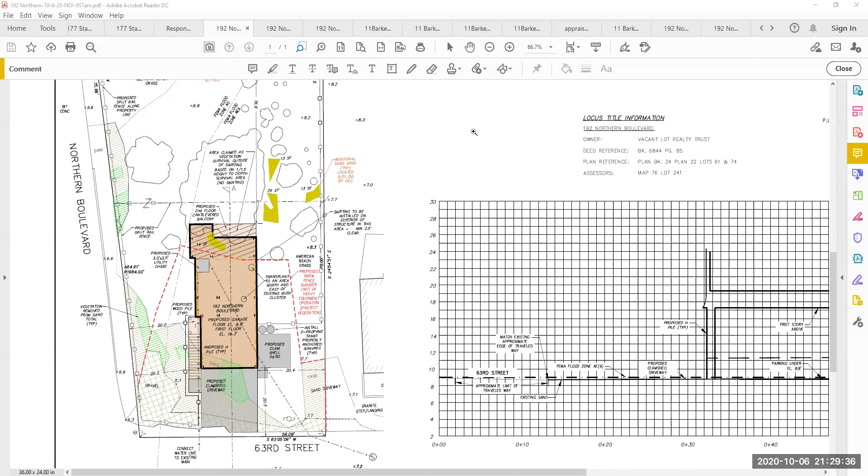the property beyond the footprints we're proposing for alteration. And if you've got those other images, Julia, maybe we can bring them up. I got one more question, Tom.

The fence along Northern Boulevard, how far off the road is that? Let me see if I can check. There's a sidewalk, so there's the road and then the sidewalk, and we're right inside our property line. I don't think there's a sidewalk on this side. No, there's no sidewalk. Let me see if I have that. No, that's like half a car width. Oh yeah, so we're on our property line.

Okay, so measuring from the property line to the edge of pavement in Adobe, forgive me, is 0.4 inches, and this is a 10 scale, I think. Let me just make sure. I'm sorry, I'm off your screen trying to figure this out. Yeah, so it would be about 4 feet.

Okay, so if someone were to park there, they'd be parking on the street. Right, right. And it's the same on 65th Street along there? No, because the pavement's on property, so we would be right up a foot off. Okay, and on 63rd as well. Yeah, no, if we fence the property line, it'd be kind of awkward traveling on the paved way.

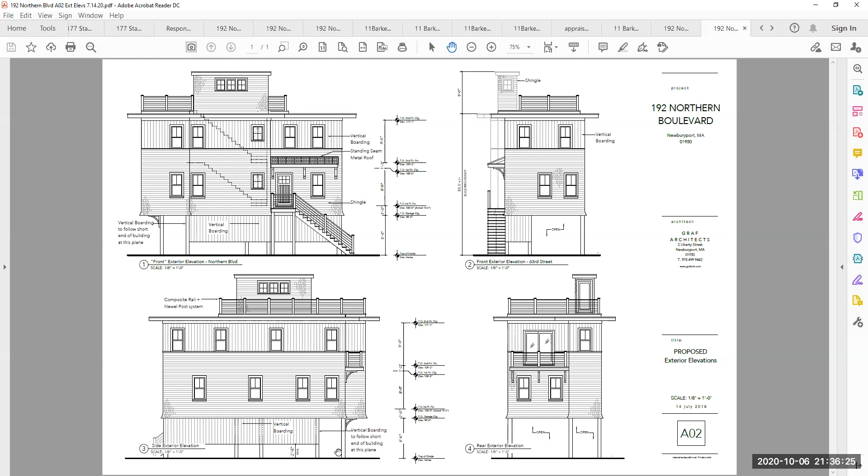I don't know, David or Steve, who asked that question about DEP. Mr. Abel has been copied on almost all the correspondence that Tom has provided to the commission, and Tom has reached out to them on numerous occasions. So I think if they had any further objections, they would have made them, but they haven't said anything since that original set of comments.

Can we go back to that, the 3 panels just for a minute? All right, let's see if I can find it. Here we go. Okay.

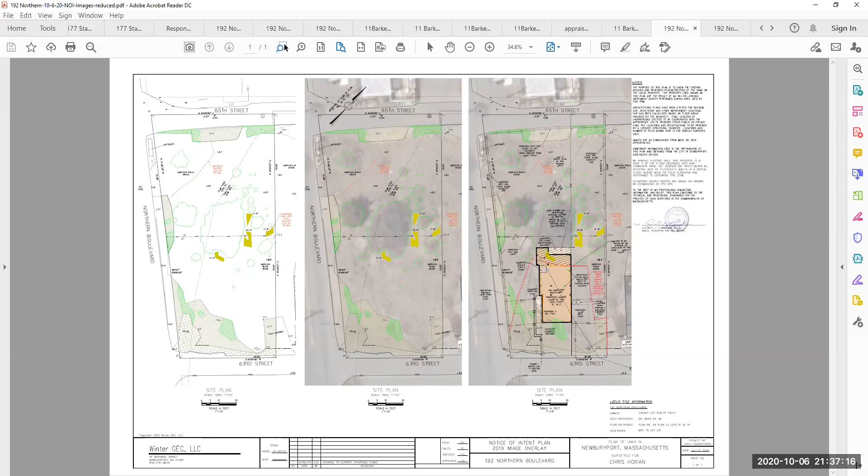So to the right of the driveway, what is that? Is that going to be vegetated? Yeah, it's going to be vegetated. If we can zoom in on that. What we've done is that area will be vegetated. There'll be the clamshell patio right up near the building with a little bit of a path coming out around to it. We do not currently show the fence going around that. While we're willing to do it, it just kind of creates a really awkward fence configuration, and we thought it would just be cleaner to come straight across.

Is that not a utility pole there also? Yeah, there's a utility pole, right down in the middle. So it's not going to be an easy place if somebody's going to try to park or pull in that location. You can see the utility pole on the plan with the shadow, actually.

I think this makes sense right here with where the fence is and where the patio is, because you've got the driveway right here. There's going to be encroachment by the homeowners, obviously, beyond what's shown, you just know there is. But this plan, I think, is going to minimize that and keep it within an area that's already developed and the previously disturbed part of the site for the most part. There's only so much we can do to limit disturbance once this gets built, but I think this plan does the best job of that.

Yeah, the only thing I might add would be to continue the fence along the property line down to 63rd Street. Right, we can do that. We were just trying to figure out how to do what we did on the other side, and it just got to be really weird, but I think we could essentially do a T right there.

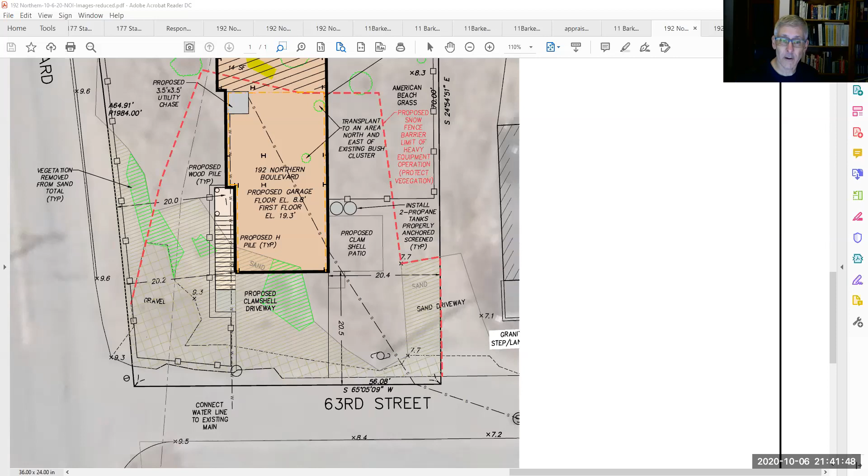This here, I still don't think it shows all the sand areas from trucks parking there. And, you know, the existing conditions need to be the existing conditions when the project is submitted. And this really was not.

So in this instance though, Mr. Chair, if I could, the existing conditions were actually more detrimental to the applicant. We erred by using the conditions prior to the start of construction. Excuse me, the existing conditions would have been more favorable to the applicant. By using the conditions at the start, prior to the start of construction, it was more vegetated, so we had to show that there was less area to work with. So I understand the issue relative to the existing conditions, but the existing conditions had more disturbance than what we wanted to take credit for.

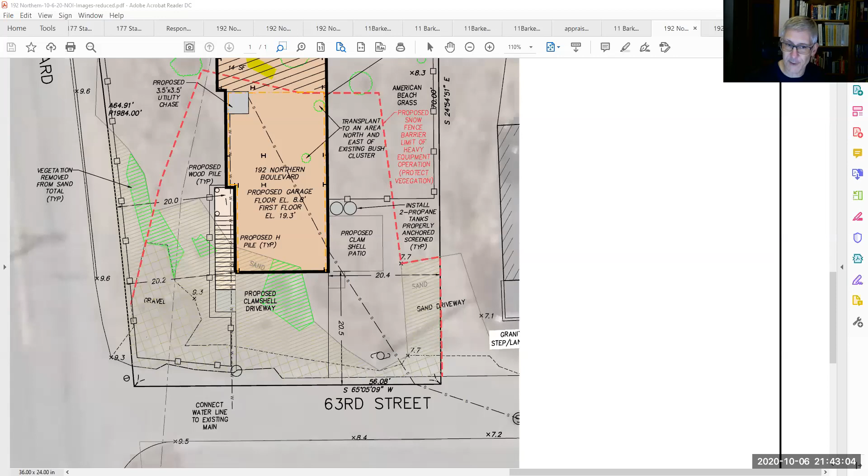Well, yeah, but it was just done a year earlier. There were no changes made to it before submission. That's the reality of it. I understand what you're saying, but I think we're saying the same thing. It's fine. Yeah, but I guarantee you I would have done the same thing if you did the actual existing conditions. But yeah, at this point, I'm more or less satisfied. Thank you.

I don't know, I think it would be - and I'm not trying to delay anything - but you know, all these colored areas, I find them confusing and not all that well marked, and it would be a lot better to have a legend showing the different things.

You can see the yellow section that's underneath the house there. I just found all these things pretty confusing. Right, I understand that. There are leaders to each representative ones of those. So if you can look, you can actually, if you kind of squint on your screen, you can see that it has a label. It says vegetation removed from... I see that. Yeah, but in a lot of cases, I hear you.

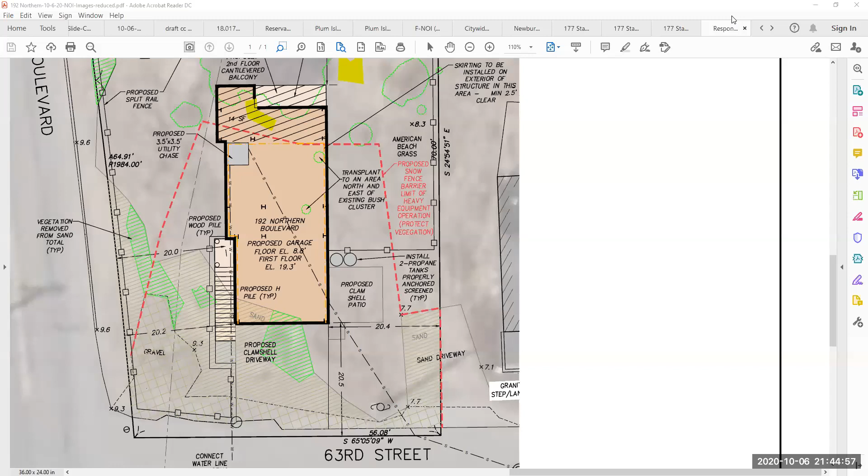We could get you something with a legend on it as a condition, if that makes it for... Are you talking more for the sort of file perpetuity, or do you feel like you need that? Yeah, I would like something that more clearly explains what all these hatched areas are. Good, okay, can you make that a condition that Tom submit that? Because obviously this plan is much clearer, which is actually the site plan, right? That Tom can provide that prior to the issuance of a building permit? That's fine with me. Okay.

What did you say? Would you say that again, Lisa, so I can write it down? That a legend be provided prior to the issuance of a building permit. Okay, yep, great. I might just say revised site plan that shows the fence extension to 63rd Street and a legend. Yeah, same, that's great. One condition is fine.

All right, do we have anything else? No? Okay, do we have anybody in the public who wants to comment? Raise your hand if so. Well, I am not seeing any raised hands other than Lisa's.

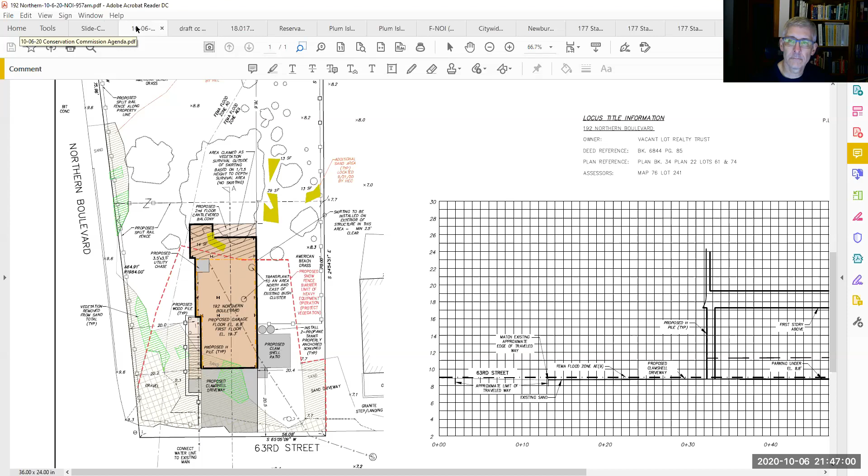Before you move on to the next matter, I'm sorry, do you want to take a vote on installing a split rail fence on the adjacent property along 63rd Street that we will show then in the as-built? It's a great idea. Yes. Somebody want to make a motion to that?

Make a motion that the as-built plan will show fence along the adjacent property on 63rd Street. That's 565th Street, correct? Yes. Second. Isn't that 563rd Street? No. Oh, you're right, 563rd, it is. But it's along 63rd Street. Correct. It's another double lot, but that one was developed head to toe before we touched it, basically, between the old driveway and the building.

Okay. Do we get a second? I think Dan did. Okay, Paul Haley, Yeah. Steve Moore, Yes. Dan Warshall, Yep. David Vine, yes. Jane Sender, Yes. Ron DeCola, Yes. And I vote yes. Thank you very much. All right. Thank you.

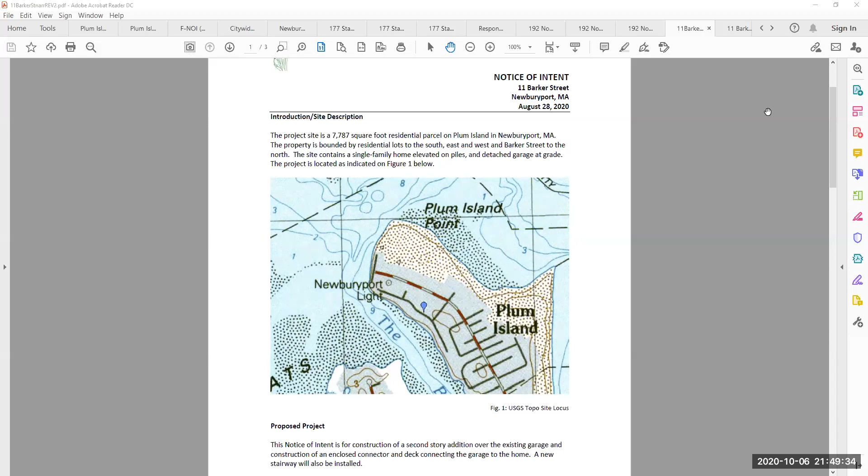So this is a continuation from the September 15th meeting. Just to refresh your memory, this is an existing 2.5-story home on a full foundation and a detached garage on a slab. The proposal is to create a second-story addition over the garage, elevating it on piles. The property is partially within the V zone and partially within an A-O zone. The garage itself is in the V zone. And we're elevating above the V zone with the new addition and the connecting structure between the two buildings and a small deck that's proposed.

I think at the last meeting you were looking for, or we had significant discussion about the pile system that was proposed to elevate the addition over the garage. And since then, the architects have consulted with a contractor and have determined that they can remove the garage roof and install 6 steel piles in order to support that, as well as the connector to the house. And then the deck would be supported by pre-augured wooden piles. So that was the bulk of the discussion having to do with the foundation system and what we were going to use.

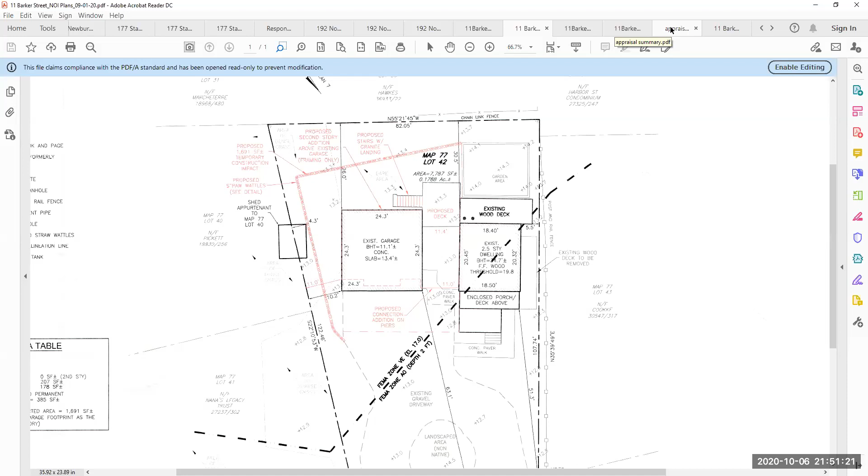And then there was also some discussion about the compliance with the wetlands ordinance and the appraised value versus the project cost. And I think Ken Savoy is on the line as well. He can discuss that with you. We did receive a separate appraisal, and that information has been submitted to Julia with the current value of the property and the appraised value, assuming the improvements, and we are still within the maximum value that's permitted with about $2,500 left over based on the appraised value.

We do have that signed significant improvement determination that was submitted to you as well. Yes, right here. The last meeting, we had the cost estimate that didn't include the interior work in your cost estimate. Has that been accounted for? I'm going to turn that over to the architects to see if they can respond to that.

Good evening. This is Ken Savoy. So, yes, we did have a discussion at the last meeting. However, since the owner had gone forward and requested an appraisal, we chose to analyze that approach, and the difference in value between the existing structures and the improved structures is less than the 50% threshold. That appraisal is based on a finished space for the additions, so we feel we have appropriately accounted for a finished product within this approach. We provided copies of both the existing appraisal and the appraisal of the improved property, and that was provided to Julia along with the summary that you looked at a moment ago. Yes, and I forwarded those appraisals to the commissioners as well, and I have them here if we need to look at them in any other kind of detail.